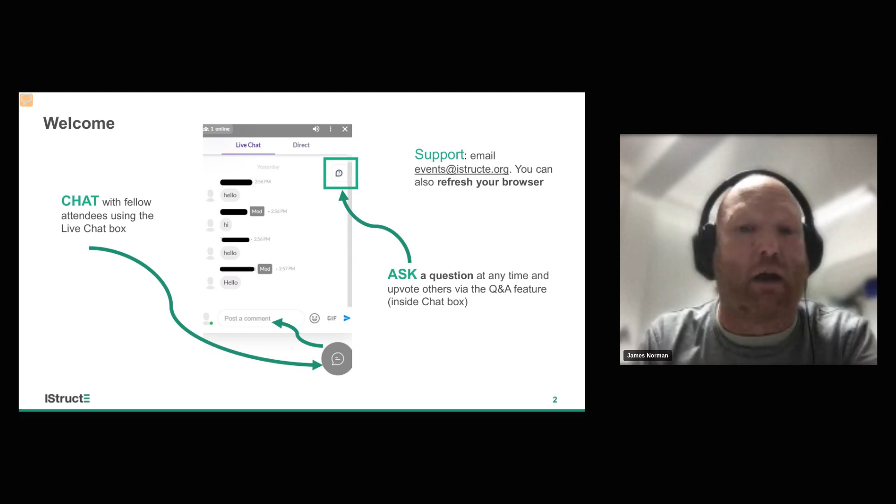So I'm going to be your host for this evening. My name is James Norman, and I'm a professor of sustainable design at the University of Bristol. This evening, we're joined by Alix, Flavia and Raffaele, all from the University of Bristol. We're all colleagues together, and we're going to be talking about different aspects of the future of structural design.

Alix is going to be talking about ethics. Flavia is going to be talking about reuse of existing buildings. Raffaele is going to be talking about probabilistic approaches. And then I'll be talking about what the future of structural design could look like.

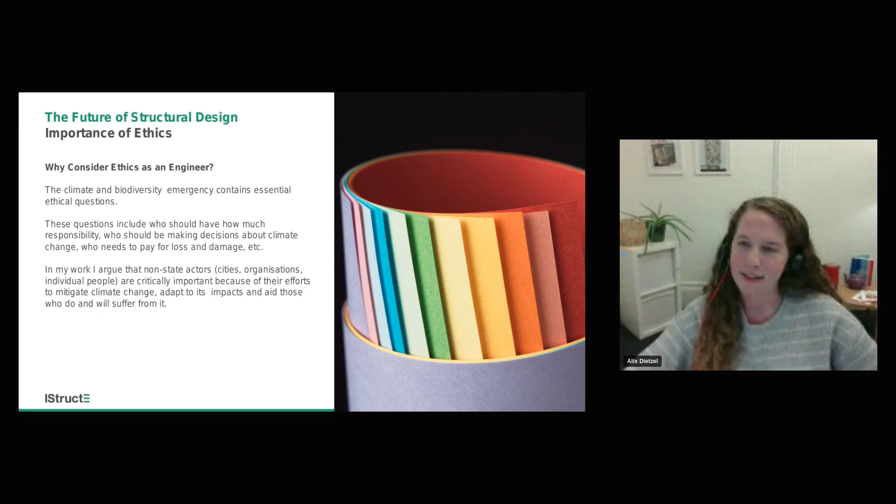So the first question to ask when writing the chapter was, why should engineers, and in particular structural engineers, think about ethics, and why was ethics a key part of the book? Obviously, to someone like me who thinks about this all the time, the climate and biodiversity emergency contain essential ethical questions, and that is what my work and the work of people like me is all about. Those questions include who should have how much responsibility, who should be making decisions about climate change, who needs to pay for things like loss and damage, etc. So for me, the ethical dimensions of climate change and biodiversity are kind of my bread and butter.

But when thinking about why it might matter for engineers, what's important to note is that in my work, I argue that what I call non-state actors, so people like cities, organizations, or even individual people, are really important in ethical questions around climate change, because their efforts to mitigate climate change, adapt to its impact, and aid those who will suffer from it plays a key role in the response to climate change.

And because of that, they're really important, including engineers. Most importantly, these actors can create conditions for systemic change. That means they can change the way we do things within industries, within sectors, or within cultures or ways of doing things.

So really, the chapter is trying to stress that your role as a structural engineer or someone working on a project, even if it's a small role, can be quite significant in terms of the kind of ethical impacts that you can have.

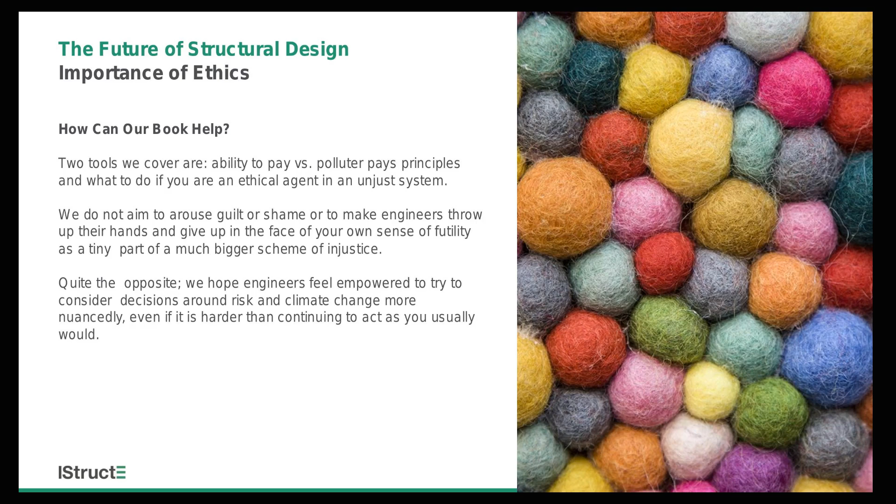In fact, we want the opposite. We really want engineers to feel empowered to try to consider decisions around risk and climate change more nuancedly, even if it is harder than continuing to act as you usually would.

So whenever I take this subject matter to an audience, whether that be students or the public or tonight engineers, I always want you to understand that ethics can help you to make things slightly better, and shouldn't make you turn inwardly towards guilt and shame, because that's a distraction.

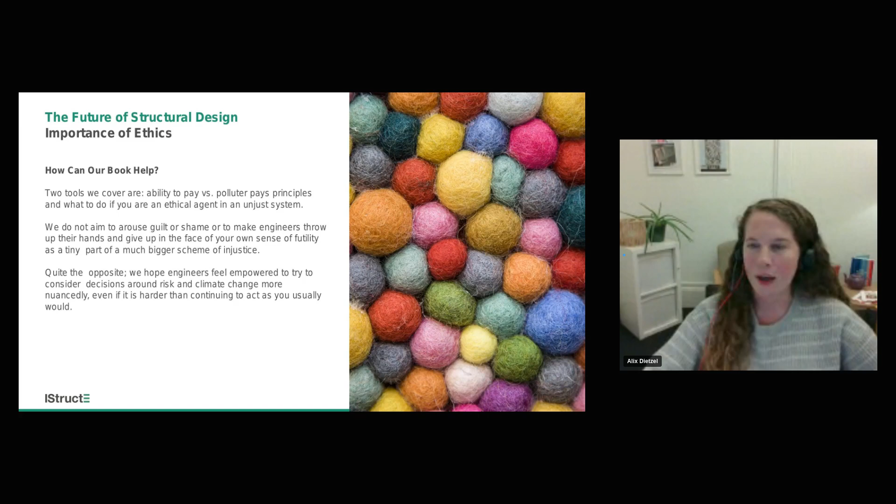We're part of a bigger system. We have a role to play, and we should use the momentum that we have as individual agents of justice. So that's the kind of main message of this chapter.

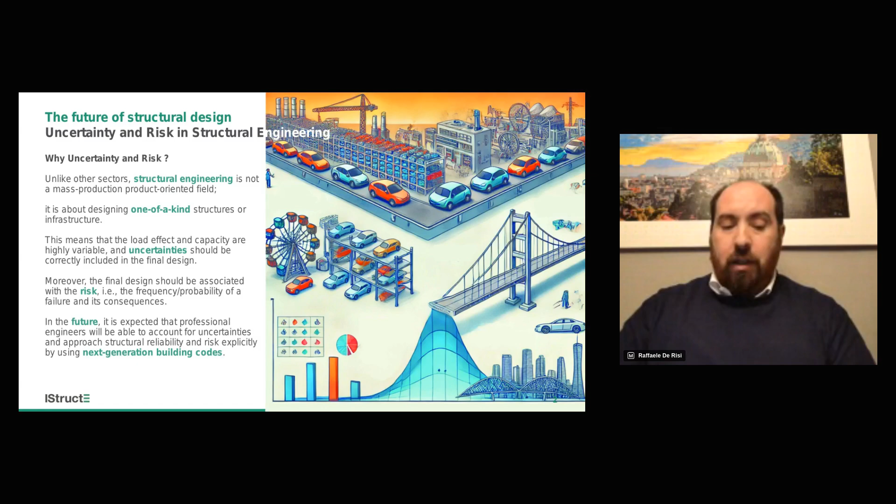Let me explain a bit more. We are not an industry of mass production; we create one-of-a-kind structures and infrastructures, and these are affected by stressors. Think about wind loading, gravitational loads that may be very variable. There are many aspects that may lead to a lot of uncertainties.

At the same time, we try to provide the structure with capacity and strength, which is itself affected by uncertainties. So we need to embrace uncertainties and propagate them to the final result. In addition, the design should also be associated with risk, where risk is defined as the frequency or probability of failure, so what can go wrong, and the associated consequences.

We think that in the future, practitioners and professional engineers will be able to propagate and consider all the uncertainties and address reliability and risk explicitly—not just with the approach we use nowadays, but explicitly providing results in a very clear manner.

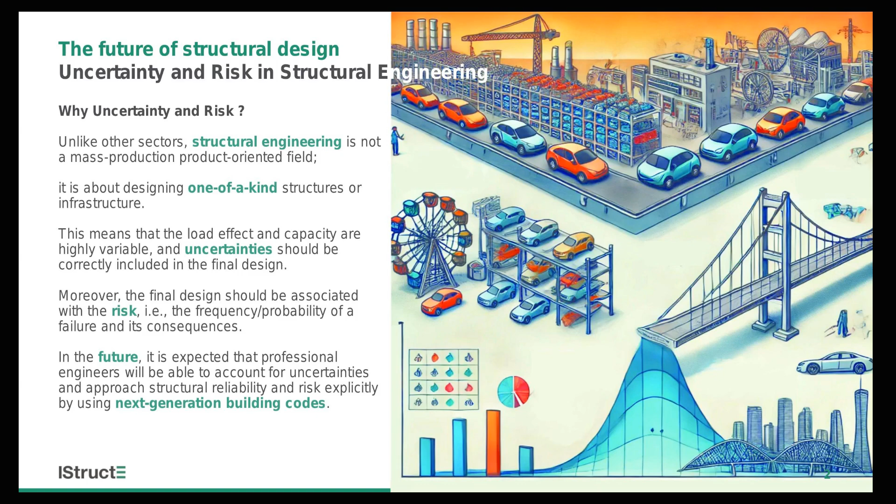This is what we think should be the next generation of building codes, in a period where several Eurocodes are going to be updated, and where computational power and many tools are available, so all these methodologies can be easily implemented.

But what was the idea behind the preparation of this book, and the set of questions we tried to answer that ruled the preparation process of the book itself?

As always, we tend to build upon the shoulders of our ancestors, and we create models as engineers—mathematical models, structural models, probabilistic models. We know that all models are wrong, but some of them are useful. Doubt is an unpleasant condition, but certainty is absurd.

Building upon this background, in preparing the book we considered what aspects we should discuss, and what we have discussed in the book. In particular, we discussed the treatment of uncertainties in structural engineering, and provided a theoretical and practical introduction to structural reliability methods, moving from the classical approach up to more modern simulation-based approaches.

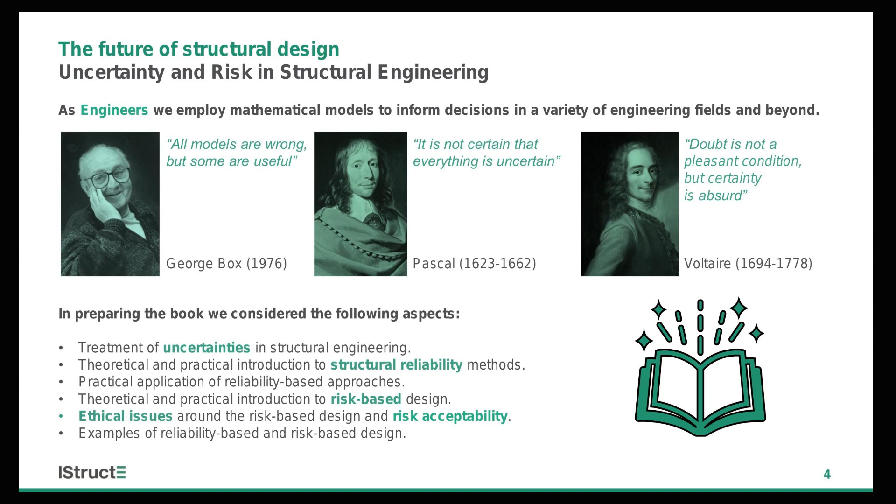Across the book, we will also find some examples of what we think is reliability-based and risk-based design.

Once we organized the book, we also asked ourselves: is what we are providing here different from current practice? Is this something new? You will see in the book there is a chapter about the history of structural reliability, and this is a well-consolidated topic in the literature.

The methodology that structural designers use every day is identified as level 1, or the semi-probabilistic approach, where we use the so-called partial safety factors.

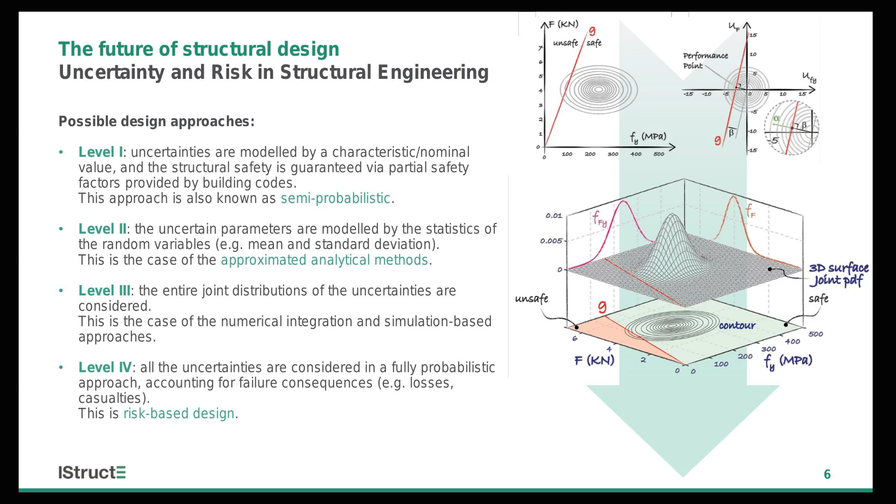However, nothing stops us from introducing probability distributions more explicitly, either just by mean and standard deviation or the entire shape of the distribution, moving to level 2 and level 3. As soon as we introduce consequences, we move to level 4, which is risk-based design. Some of these approaches are also coded for you, and codes are made available on an online repository platform.

In studying all these aspects, we could not avoid discussing important aspects such as structural analysis, material properties, and physical testing, each one deserving a specific chapter.

Structural analysis: it is very well known that when we create structural models, there may be a lot of uncertainties, for example about boundary conditions. Sometimes we have pure fixity, or there is the need for introducing some elastic deformability. So these are all things that must be accounted for in our model—let's call it model uncertainty.

It is clear that as soon as we have uncertainties, these are not related only to the stressors—gravity load, wind, earthquakes, snow loading—but also to materials. Materials are a huge part of the epistemic uncertainties that we deal with.

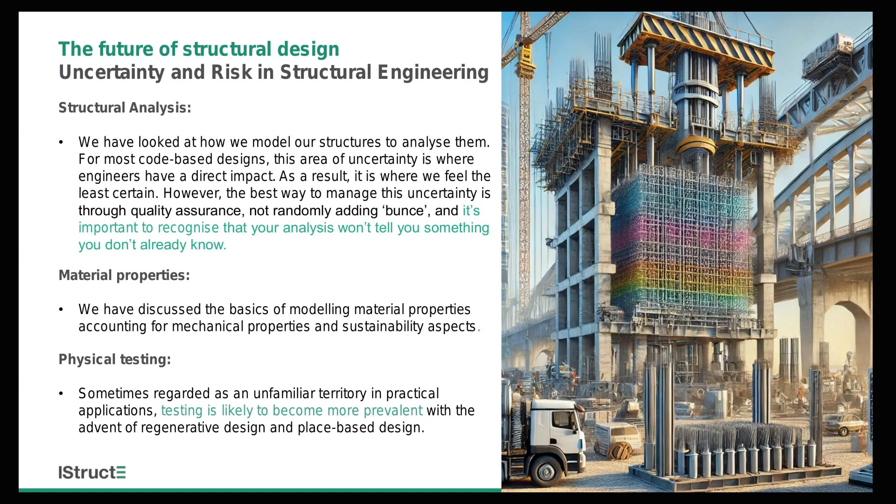And therefore, we provided some details on how to characterize the uncertainties for material properties. One of the key components to acquire data for material properties is certainly physical testing. Physical testing is treated in this book in a specific chapter, providing not only the way for acquiring new data and reducing epistemic uncertainty, but also as a way for design. And we acknowledge that testing is becoming more prevalent with the advent of regenerative design and place-based design.

And certainly we move to risk-based design now. So we need to be able to define what risk-based design is. We also try to develop some procedures that are the starting point for opening the discussion about this very topic. So when we talk about risk-based design, we need to consider the socially acceptable risk level.

So we have alternatives, we have different options. We investigate these options with conventional approaches, but then we need to come up with the assessment of the risk associated with different alternatives. And at some point, we need to compare the calculated risk and the acceptable risk levels.

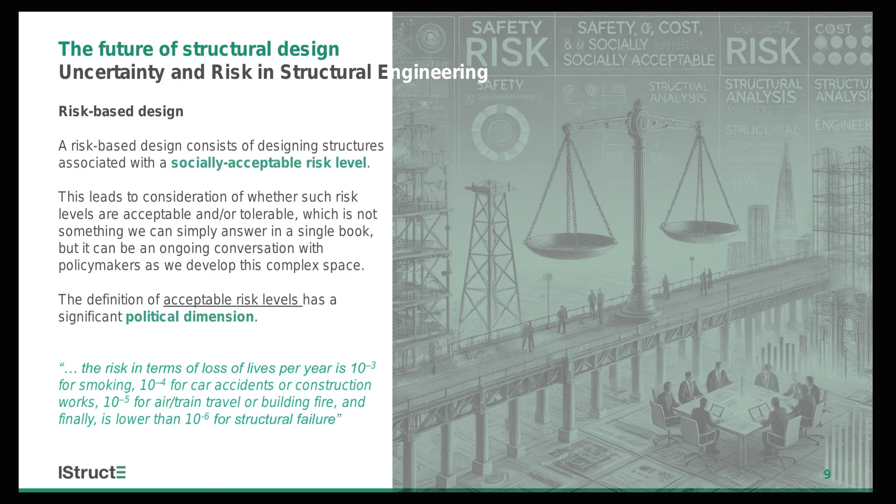However, acceptable risk levels cannot be defined by us. They have a very huge political dimension. Alex has introduced this to you earlier. And we started the discussion about comparing this risk level with risk levels that are more clear to us, such as the risk associated with a car accident or loss of life due to smoking, for example. These are all numbers and orders of magnitude that we should have very clear in mind.

So we identified a risk cyclicity where we start with the risk goal identification. We compute the risk, so we explain how to convolute exposure, hazard, and vulnerability. We compare risk goal and risk assessment in order to appraise the level of risk with the risk appraisal step, and then after that we come up with a decision that depends on the different alternatives that we have.

And this does not stop here, because then we have monitoring and review. This should be constantly monitored, because we are moving from the risk of a new build to the risk of existing structures. And this entire procedure should constantly be communicated and discussed with stakeholders and owners.

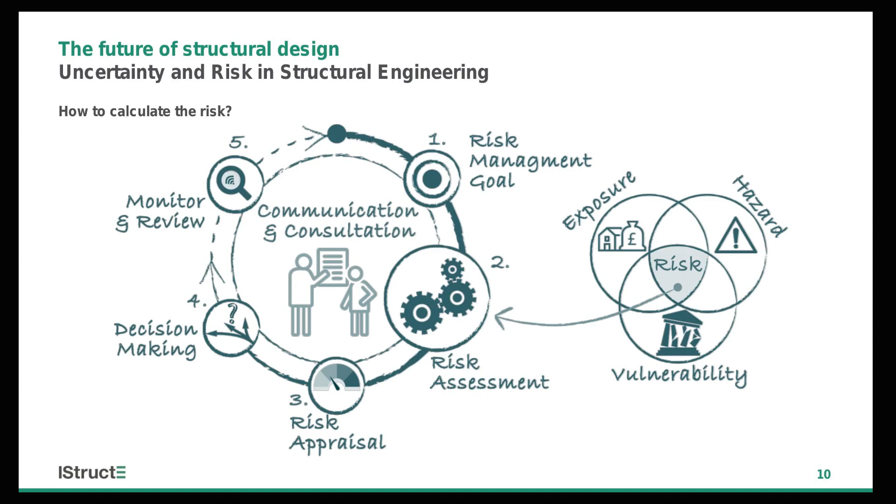So this is what we think and what we have presented. We have also presented some examples across the book, as I mentioned earlier. In particular, we studied a rammed earth building, and we discussed both one of these walls and a joist—very simple examples. This is not a how-to, but rather a starting point to discuss these very topics.

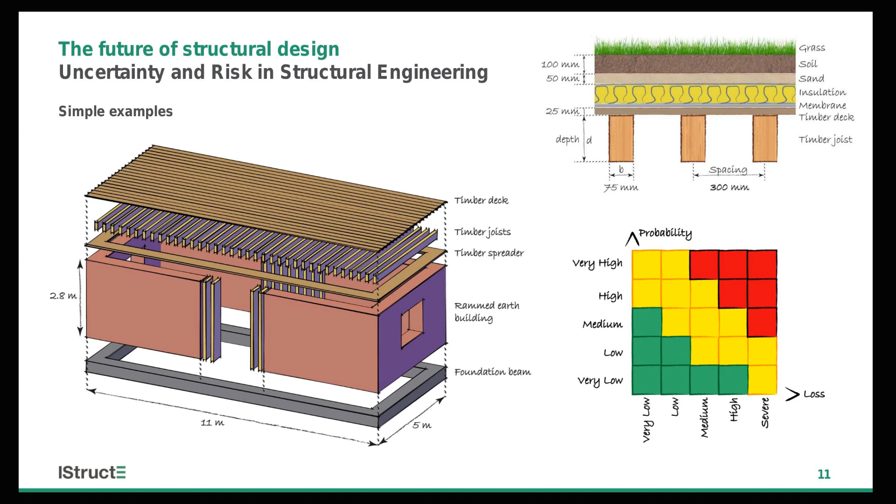With these very simple examples, we can already provide you with, for example, loss curves, which are curves providing the relationship between the loss and the probability of exceedance of that loss. This loss can be both economic, in financial terms such as pounds, or in terms of sustainability, such as CO2 emissions. These are heterogeneous quantities that can also be combined, though obviously the combination of heterogeneous quantities is out of scope of this book.

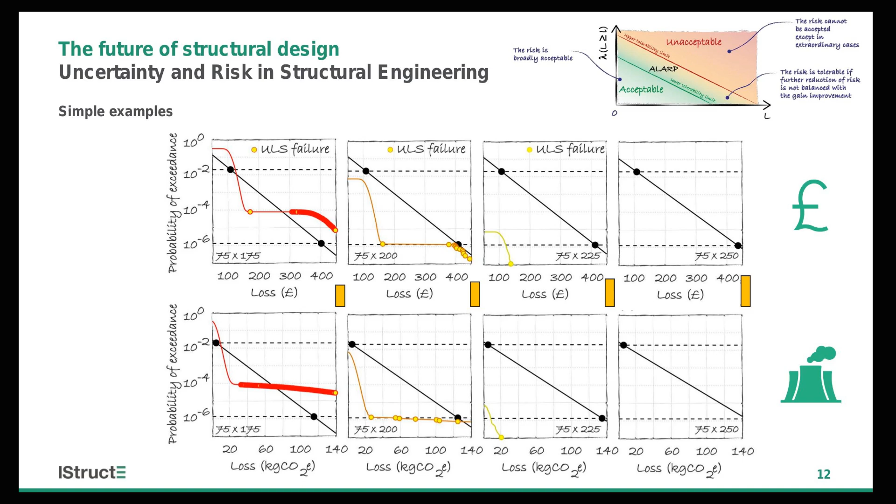And when we have the losses, we need to be able to compare them with some limits, and the definition of these limits can borrow the approach adopted for the ALARP region—as low as reasonably practicable—where we may have acceptable, unacceptable, or acceptable-with-extra-expenses areas.

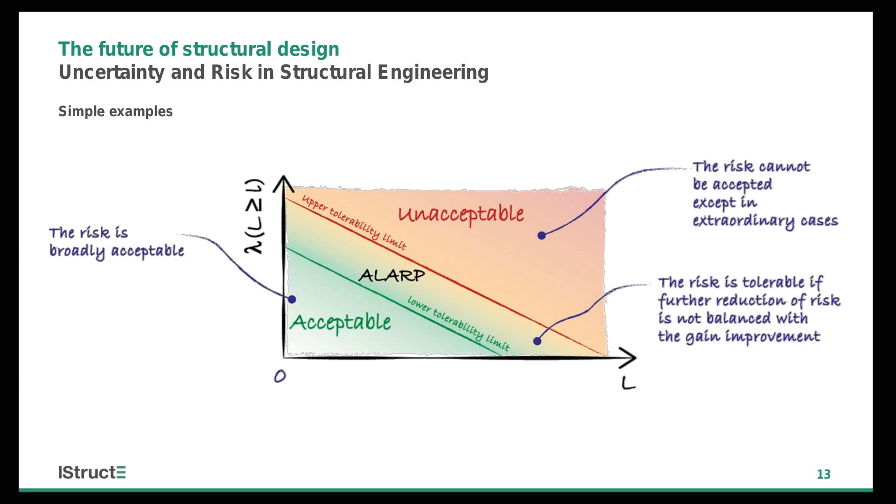So in defining all these aspects, we can now tell you why this book can help and how this book can help. Well, this book comes almost two decades after the compilation of the very first probabilistic structural model code.

It may provide you with some flavor and some idea of how the future may look like. Apart from the methodologies and techniques discussed in the book's different chapters and appendices, which keep evolving and are by no means exhaustive, there is a need for a broader discussion on what risk-based is, what risk limits are, and how they should be defined. We hope this book will help as a first step towards the future, informing your opinion on what comes next for structural engineering. Thank you for your attention, and I now leave the floor to Flavia.

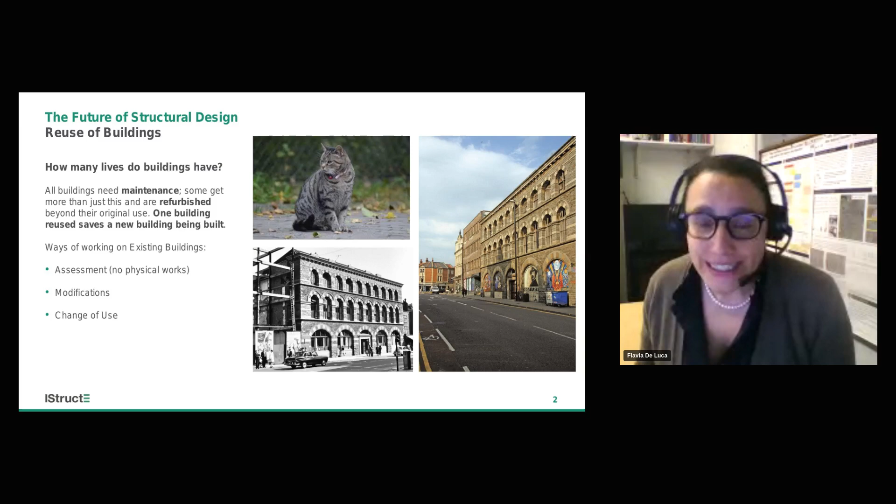First, there is the very question of how many lives do buildings have? All buildings have multiple lives. All buildings need maintenance, some get more than just this, some are refurbished and go well beyond their original use. The thing is, one building reused saves a new building being built.

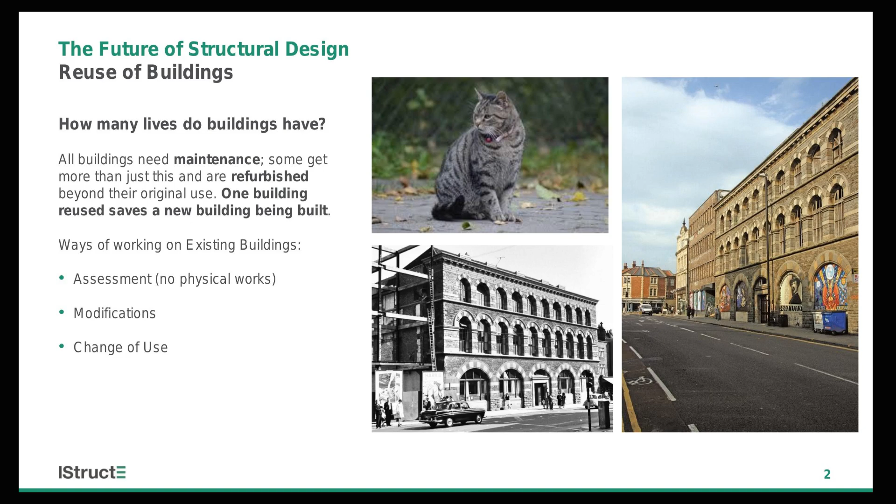As structural engineers, we can work with existing buildings in different ways. We could assess performance, just double-checking if the building is fit for purpose, with no physical works. Or we could make modifications, go on with interventions, or deal with change of use for buildings, and all the important things related to this. So how have we tried to approach this huge topic in the book?

First, we tried to provide some jargon about important information on existing buildings, and also the code and recommendation framework. What you see in this slide is the hierarchy of terms for existing buildings provided in ISO 13822, and the different levels of approaches and terms you will use when dealing with existing buildings.

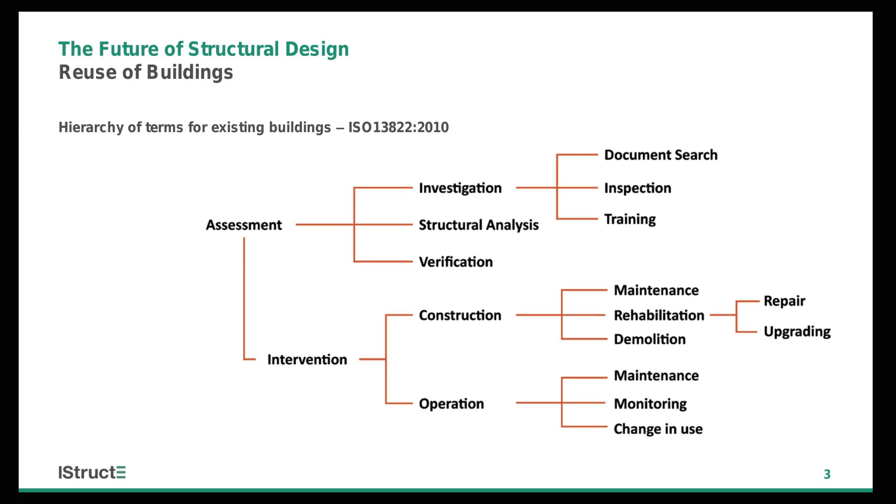The other piece of work we've tried to do when dealing with reuse of buildings is about what we need to cover. What are the important steps when dealing with existing buildings? We've covered the important bits about collecting, evaluating, and updating data—what are the methodologies, what are the general recommendations for structural engineers.

Also, recommendations for application of the partial factor method and direct use of probabilistic methods consistent with those for new structures—so where you, as an engineer, can find information, which code or guideline you can use, and how you adapt the approach normally used for new buildings to existing buildings.

Another important piece for existing buildings is the question: is the target reliability exactly the same? Do we ask exactly the same of existing structures, the same performance in all cases? Or are we happy to accept different target reliability levels, for example when the building has lower residual working lifetime, or when its inherent value involves listing or conservation aspects?

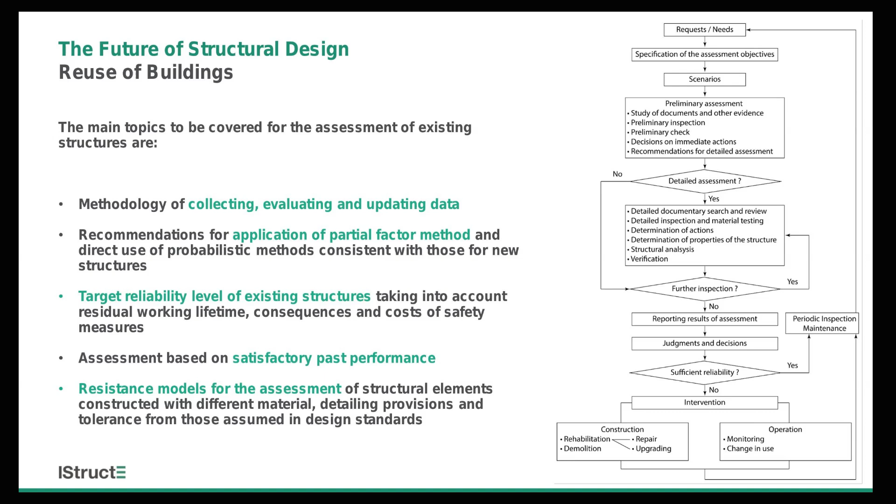What we have been trying to do in the chapter of the book related to reuse of buildings is to provide an overview, guidance, suggestions, codes, further readings, just to equip professional engineers to approach the future of structural design, advanced approaches for design, also in the context of reuse of buildings.

And exactly as it has been done for the case of risk-based design, also for reuse of buildings, we have produced a case study about a detailed assessment of an existing structure. In this particular case, we had a structure designed for gravity loads only at the beginning of the 20th century, which could be considered a modern heritage structure. The exercise is about how this structure is now withstanding seismic loads.

This is done in the framework of Eurocode 8 Part 3. So how do you go about dealing with the knowledge of the structure, starting from geometry? How do you build up your survey and get the geometry and drawings of your structure from desk study, in situ surveys? Then inspection and information about the structural detail.

In that case, it was a reinforced concrete structure. There are some situations in which you need to go for destructive and more invasive testing, and some situations in which you can use non-destructive testing and calibrate them.

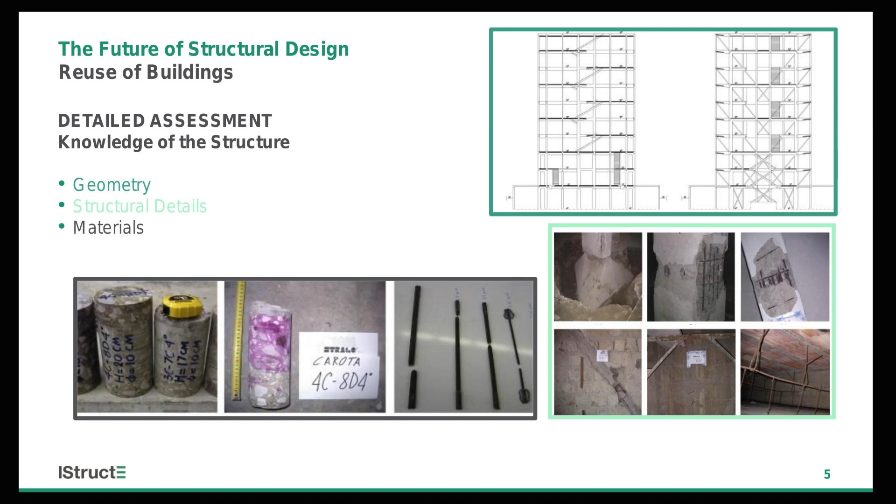The other bit of the case study has been about building the structural model, choosing the right type of structural analysis, and then finally assessing the performance of the structure to go through specific evaluation on what specific intervention, if any, is needed about the performance of the structure.

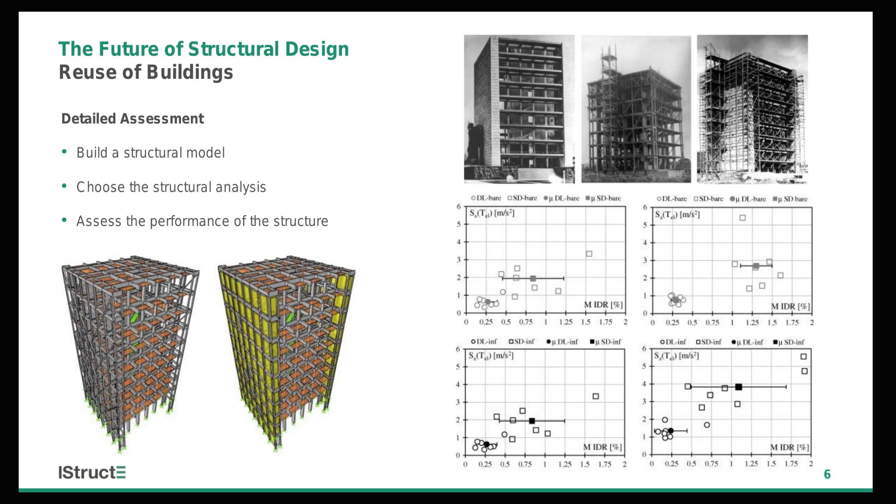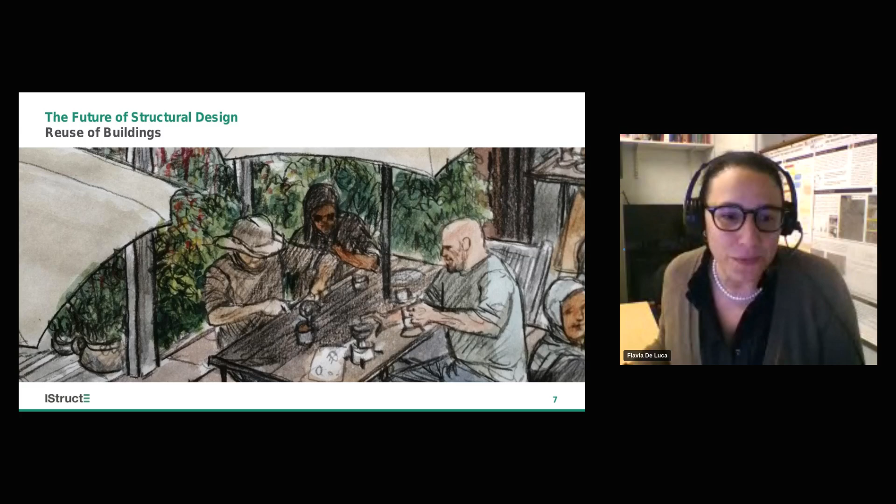A curious story about the structure: it was not designed for seismic loads, but since there were some wind load considerations at the time in the 20th century when it was designed, the performance was satisfactory. So this is the bit we have been doing about reuse of buildings, and I hope you will enjoy the reading. I'm now passing on to James.

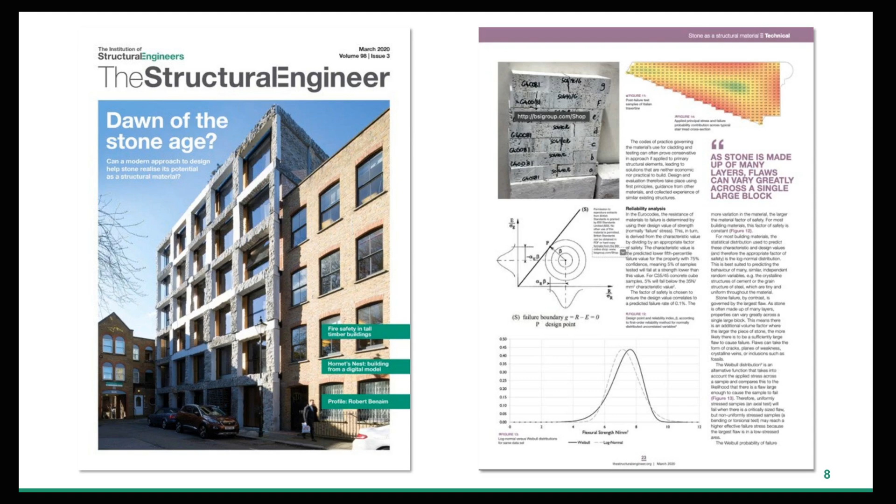And so I then gathered together what I'd like to think is a wonderful team of experts, and you've heard from some of our experts. What started as a very simple conversation about how we approach design in terms of uncertainty and risk management became a much bigger, more complicated, richer conversation as we started to say, well, hang on a minute, there's an ethical dimension here, and there's a dimension around materials, and there's a dimension around, do we even know what the uncertainty is that we're trying to model, and how do we approach these design questions when we're thinking about different materials or different types of structure or different loading situations.

So we pulled together a mixture of practicing engineers and academics, people who work in the risk space, the ethics space, and the application of design space, and we came together and pooled all of our ideas, and we came up with a plan.

And the first framing of that plan was to kind of frame it all around the idea of PAS 2080, and this idea that in the future we should be thinking more and more about how we build nothing, how we use what we already have, how we build clever, how we create new materials and new approaches, and how we build efficiently.

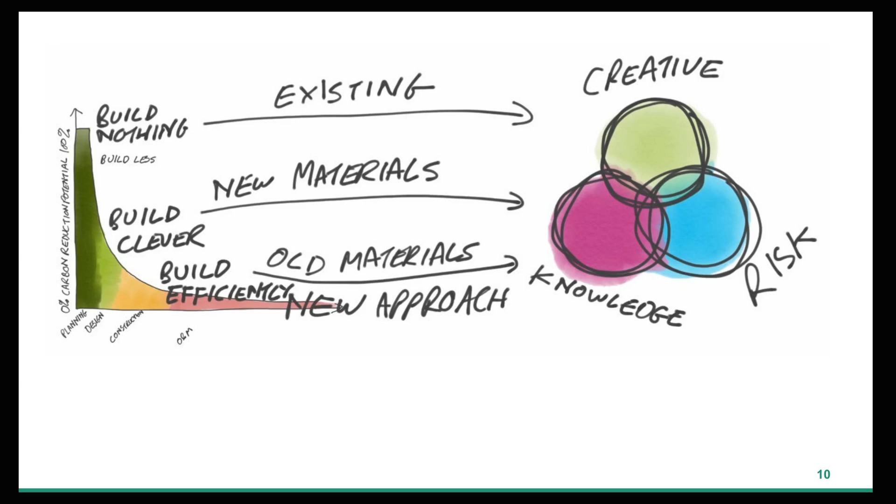Now, this was before 2022, and the reason that's important is because in 2022 I started a journey discovering regenerative design, which led to the publication of the book, The Regenerative Structural Engineer.

And in that journey of discovery and learning about the subject and trying to frame how our structural engineer is regenerative, which I think is super important, I came across this really helpful framing for the difference between sustainable, regenerative, and circular.

Now, I don't want to dwell too deeply on the exact details of this framing, but I had this lovely aha moment realizing this is a great way to frame the book.

You know, we could talk about initially why we need to be thinking about this. What is the future of structural design? And what are the ethical drivers for changing the way we approach design?

And then moving into when we're doing codified design, why we should design to the code and no more. How can we be as efficient as we possibly can? And how can we change our mindsets and practices to absolutely optimize efficiency and minimize waste?

And that kind of falls in the sustainability category. But then how do we go beyond that?

So if we're thinking about something like regenerative, which is maybe using something like the continuous place-based design process, which could see new materials emerge or existing materials being utilized, but from unknown sources.

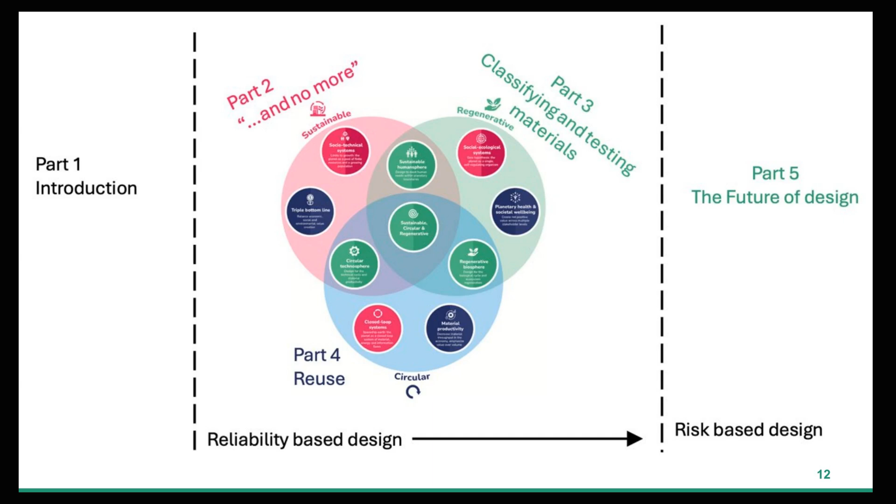And that leads us into a question about what is the future of design. In my mind, I'm excited about the future of structural design, because the engineer's role is going to change. It's going to diversify and become quite a lot more exciting. I think this is the first time I'm publicly sharing this, so I'm quite excited about it.

But I approached an artist, a guy called James McKay, who we used some of his artwork in the Regenerative Structural Engineer, to help us picture the future. We asked James to produce some specific work for the book, which really tries to capture visually what the future might look like.

So actually I was talking to someone just this morning about regenerative design, and they were talking to me about speculative design. So maybe this book is a piece of speculative design work. What could the future look like?

So within the context of designing to code and really optimizing our design and minimizing waste, what might that look like? What might it look like if we were to have a much higher degree of certainty over the decisions we made? If we were to have much better quality assurance, both on-site but also off-site in the manufacture of components, so that we could minimize risk and reduce our standard deviations - and all of that is already built into the code if we go and look for it.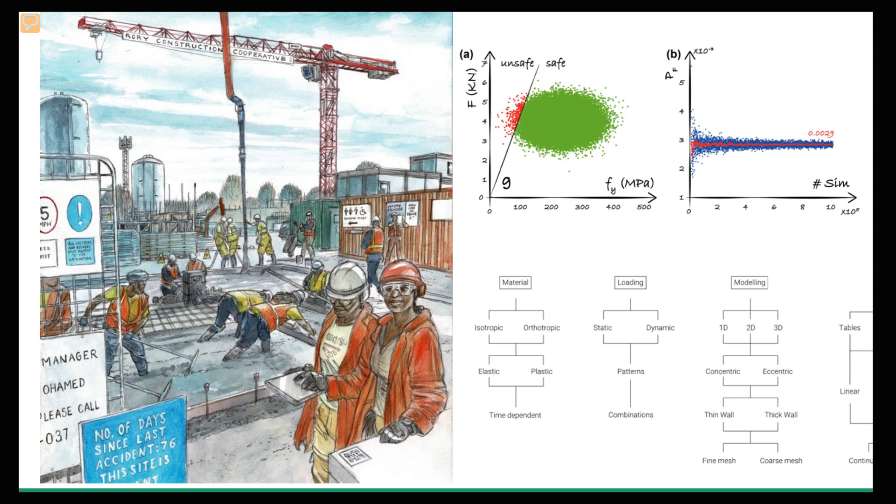And in that space as well, how do we minimize our risk around modeling, and how do we understand the complexities of modeling and give ourselves the confidence that the way we model is right?

Moving forward beyond codified design, because I feel like codified design is amazing, but it will only get us so far in the future of structural design, because if something is codified, it's also going to become more and more easy to replicate using artificial intelligence and other approaches. So as engineers, what is the thing that we bring?

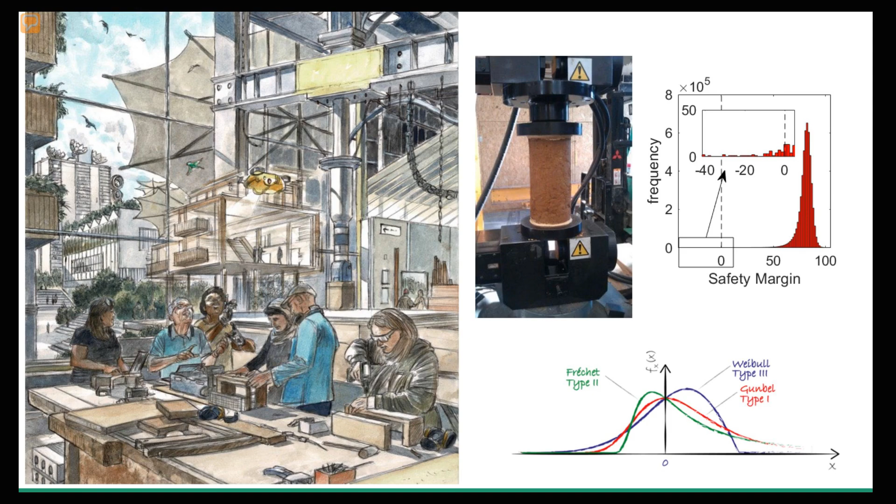Then we quantify the behavior, not in a deterministic way, but in a probabilistic way. Then we analyze it and work out how safe is it, what is the probability of failure. To me, bringing together that testing approach and the mathematical rigor of modeling the probability distribution of the material, and utilizing that in a reliability analysis, feels really exciting.

That could look like different things. Here, it could be in the reuse of buildings, and we might be thinking about different materials, testing different materials, recertifying materials ready for reuse in the future. We might think about how we investigate and test existing buildings, as Flavia talked about, and how we use probabilistic approaches, like Bayesian updating, to take what we already know and add additional information from our own testing as we develop further designs.

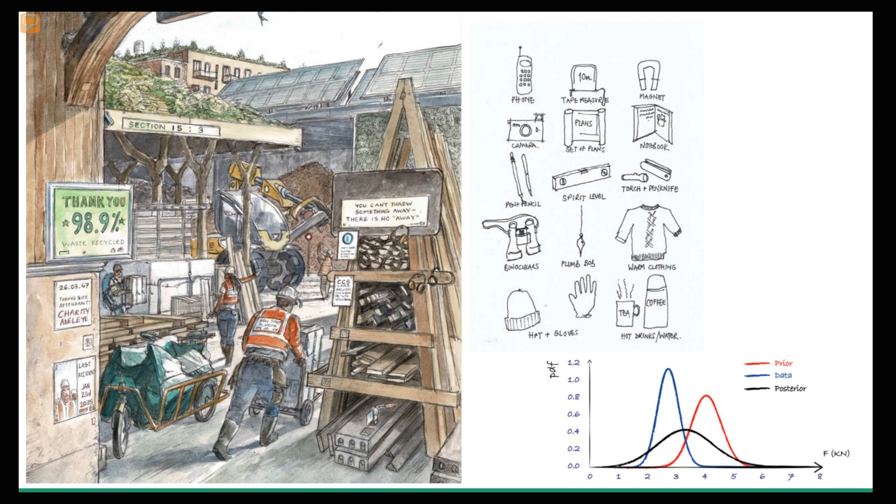I'm excited about what is the future of design. How can we really move forward, and how can we make really informed decisions using risk-based design approaches?

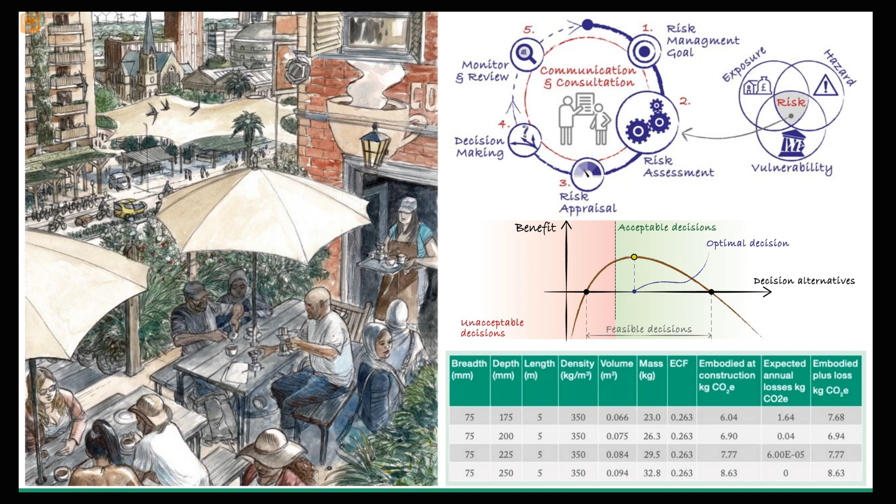I'm quite excited about the future of structural engineering and what we might end up doing. I'd like to think that we will do less mechanistic design and much more playful design, using a combination of testing and maths.